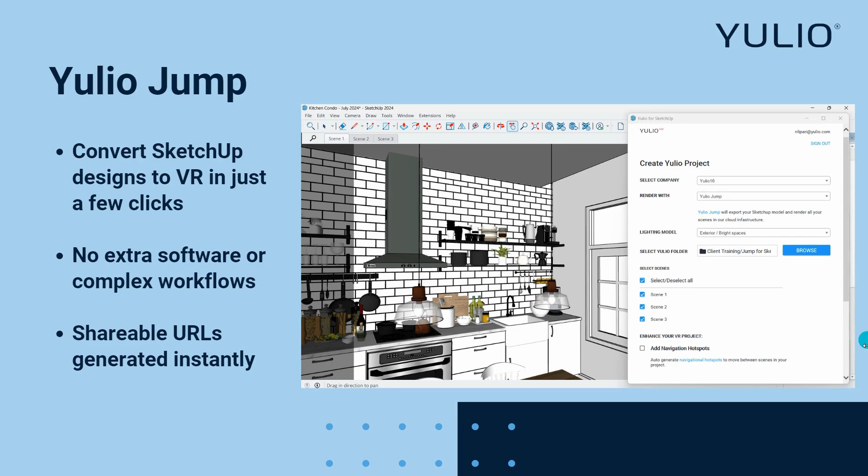To begin rendering with Yulio Jump, you need to start off by installing the Yulio plugin for SketchUp. This can be downloaded directly from the CAD plugins page on our website, which I'll show you now.

So here's this page on our website. You can access it by going to Resources and then CAD Plugins, and you can install that SketchUp plugin right here.

So the Yulio extension is free to download. However, in order to actually use it, you will have to have an active Yulio license.

With the Yulio extension, you can render 360 panoramas, which is the file you need for VR, as well as 2D perspective renders, which you are likely more familiar with. So here's an example: here's a 2D perspective render that you probably have seen before, and here's that 360 panorama, which will be used for your VR experience. Today I'll show you how you can render both of these with Yulio.

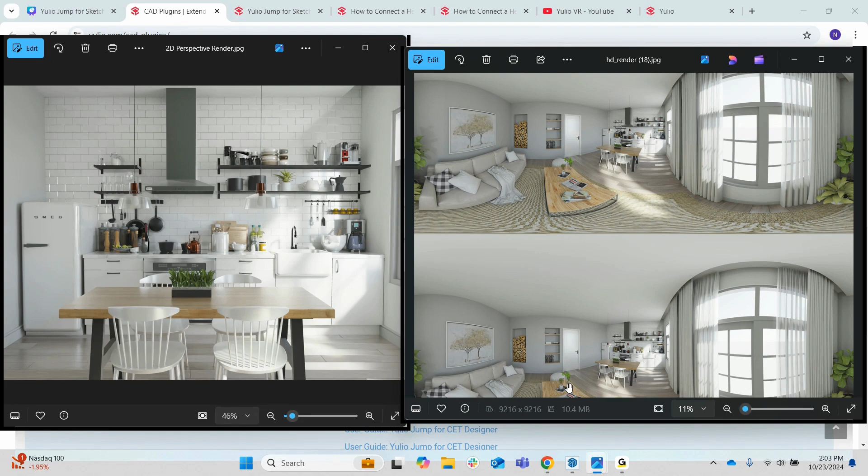All right, let's go ahead and open SketchUp and start preparing our model for rendering. So here's the model I'm working with today. This is just a small condo space. Before you render, you're going to want to think about how you might need to prepare your space.

In most cases, we recommend creating a fully enclosed building shell, so that includes 4 walls, a ceiling, and a floor. This is because when rendering for VR, your clients are not only going to be seeing what's right in front of them.

In VR, your clients will be able to fully explore your space. So if you're showing off an indoor environment, such as a home or an office, having a full building shell will give them a more realistic and immersive experience. And as you'll see later, Yulio's lighting models also work best in this type of enclosed environment, which is another reason why we recommend it.

As you can see, this is my small condo space here, and it does have 4 walls, a ceiling, and a floor.

So on the topic of preparing your model, let's talk a little bit more briefly about lighting. Yulio Jump was designed to simplify the rendering process as much as possible and take all the complexities like lighting off of your hands. This means that when you're building your model to render with Yulio Jump, you don't necessarily have to worry too much about lighting. When you render with Yulio Jump, you'll have 2 lighting models available to light your space.

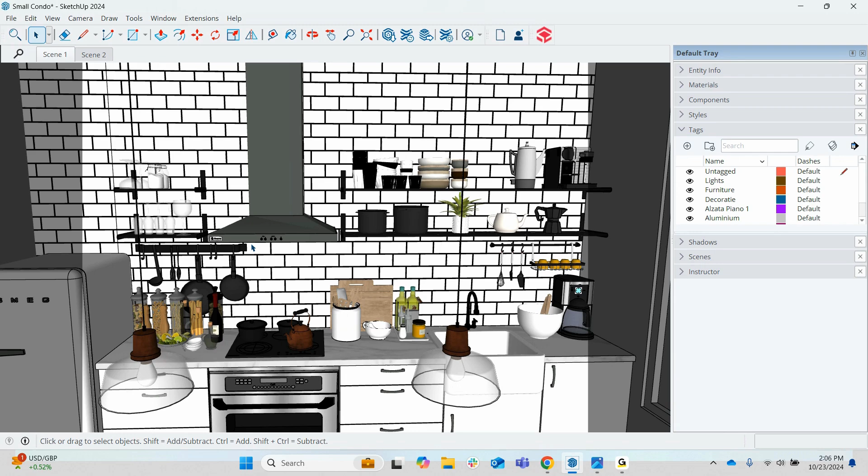Okay, the next thing you're going to want to think about is creating your scenes. So, when creating a project for VR, you can think of your scenes as different camera views that are set up around your space. Adding more than one scene will help your client explore the full scope of your space by letting them move to different areas once that project is turned into a VR experience.

As you can see, I've already set up a couple of scenes here. So I have scene one and scene two. This is a relatively small space, actually really small, so I really only need 2 to 3 scenes. I'll go ahead and add one more and show you how to do that.

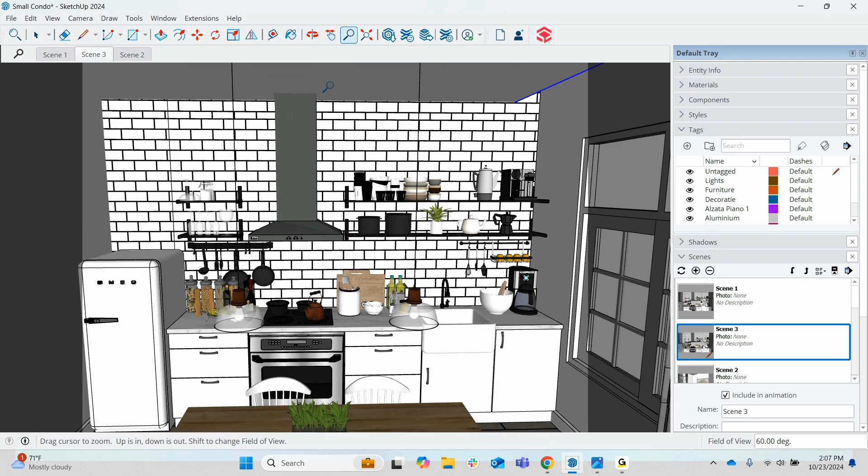I'm just going to click on this, open the scenes menu here, and click on the plus tab. Might make me wait a minute. Okay, there we go. So here's my additional scene it added, and then you can set your scene using the orbit, pan, and zoom tools. So I'm going to do that now. Just going to zoom out a little bit, move down and over, and kind of move into the back corner of the space. This will just take a little bit of fidgeting here.

And that looks about right. So generally, I like to keep my camera level at a standing height, as I'm doing here. This is probably around maybe 5'6". But you can always get creative and experiment with different camera heights.

For instance, if you have a couch or a chair in the space, you can do a seated view, which is something we've seen before. You can also lift your camera up and do more of a bird's eye view. It's really up to you. I generally like to just kind of keep my camera heights at a standing position.

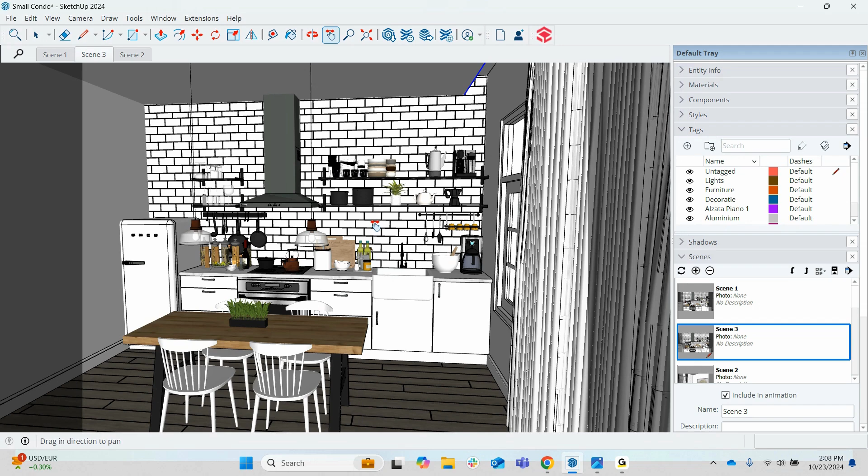All right, so here's where I'm going to place my camera for my third scene. So here's an important tip. When you're placing your camera views for VR, you're going to place your camera where you want it, just like I've done here, and then you're going to move it closer. So you're just going to zoom in a little bit. Let's just zoom into about here.

It might look a little bit funny, especially if you place it maybe like in front of a plant or something. But we recommend you do this because after you render for VR and go to view that scene, it will always appear more zoomed out than you expect. So in order to capture the view you truly want, you're going to want to place your camera in your ideal spot and then just zoom in closer. So that looks about right there.

And these are going to be my 3 scenes. What I'm going to do though is just reorganize my scenes here on the side so that my third scene is moved down. So I'm just going to press this arrow and move that down. And now they're all in order of how I'd like them to be. Again, when creating your scenes, like I said, you really just want to think about the journey or path that you want your viewer to take as they explore your space.

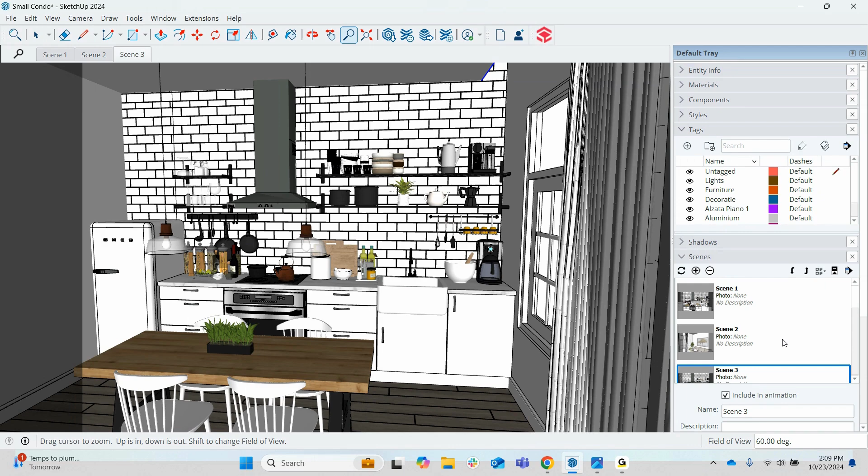All right, now for 2D perspective renders. You can set up your scenes in the same file here if you'd like. When you go to render with the Yulio plugin, you'll be able to select or deselect which scenes you render depending on if you're rendering for VR or 2D. So you don't have to worry about mixing them up.

So you'll set your camera for 2D the same way I just did, except you don't have to zoom in. You'll just place your camera where you want it, and then the view you see will accurately be represented in your final 2D render. By default, when you create new scenes, like you saw, they will be named scene one, scene two, scene three, and so on.

If you would like to customize the name, you can just right click on the scene and then rename it. So say I wanted my third scene here to actually be a 2D render that I want to render later, I can just label it 2D. And then when I go to render with the plugin, I can identify which scenes I want for VR and which scenes maybe I want to render as a 2D.

All right, I am going to be rendering this for VR though, so I'm just going to get rid of that.

Okay, so now that I have my scenes, the next thing I want to show you are some enhancements that we can make to our project before rendering.

So the first is Yulio's enhanced material tags for SketchUp. If you're looking to take the photorealism in your projects to the next level, you can apply material tags to specific objects in your SketchUp project to add a texturized effect to the object, which will be reflected when rendered with Yulio. Enhanced material tags for SketchUp can be used on a list of materials including leather, ceramic, glass, and wood.

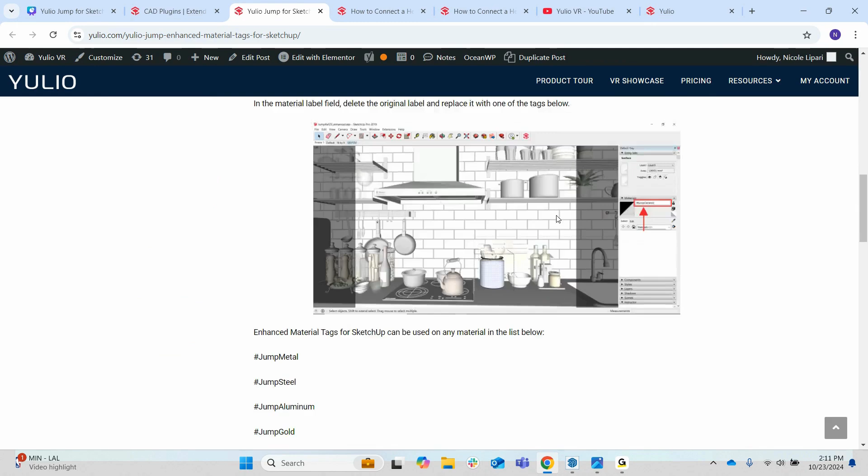If you're interested in learning a little bit more about this later on, we do have a knowledge base article on our website, which I will pull up now. So here's that knowledge base article. You can access our knowledge base by going to the resources tab and then knowledge base. So here's what that looks like. You can view our whole list of enhancement tags here, as well as see some before and after photos to give you an idea of kind of what those enhancement tags can do.

All right, now I'm just going to return to my project and I want to go to scene 1.

Okay, so to add an enhanced material tag, you're just going to click on any material. I'm going to use my hood fan here as an example. So I'm just going to click on this and go to the materials tray. And then I'm just going to click on the paint dropper tool here to identify which material I have on this hood fan right now. So I'm going to select that. Here's the material that I have right now.

And then all I'm going to do is I want to make this a brushed metal, give it a brushed metal effect. So the tag for Yulio's enhancement for this is hashtag jump brushed metal, and I'm just going to add that hashtag in front of the material that I already have here. And that's it. So now when I go to render, this hood fan will have a brushed metal effect on it. You can do this throughout your project on any materials that you want to boost the realism for. And if you decide later that you don't like that material, you can always change it just by updating the hashtag to one of the other hashtags that we have. Or if you just don't want any enhanced material on that item anymore, you can just get rid of it altogether. Okay, gonna add that back.

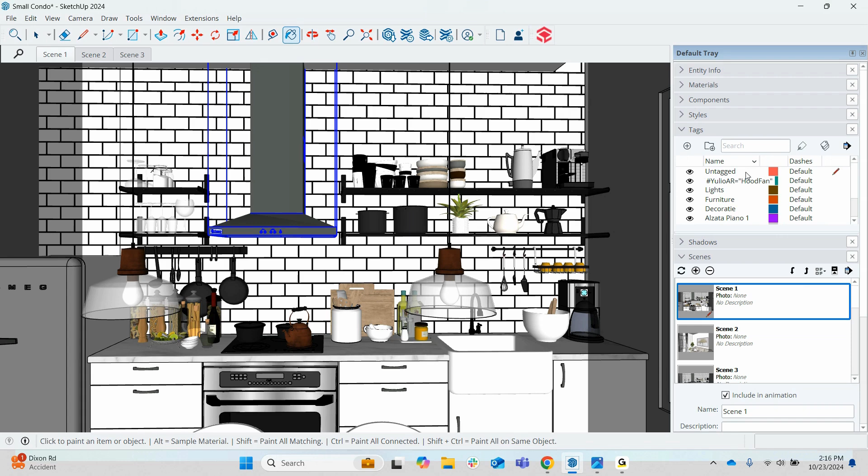So our tagging convention is hashtag Yulio AR =, and then the object name. Your object name can be labeled any way you'd like. We do recommend reflecting the object or objects you plan on including in the tag just to make it easier to identify which is which. So I again am going to use my hood fan as an example. So I will just name this hood fan, and that's it. That will save automatically down here.

Once you've created the tag, you'll need to assign it to an object. Start by selecting the item. I already have this hood fan selected. Then I'll go to entity info and then tag, and select the AR tag I'd like to add the item to. So I'll add this to hood fan, and that's it.

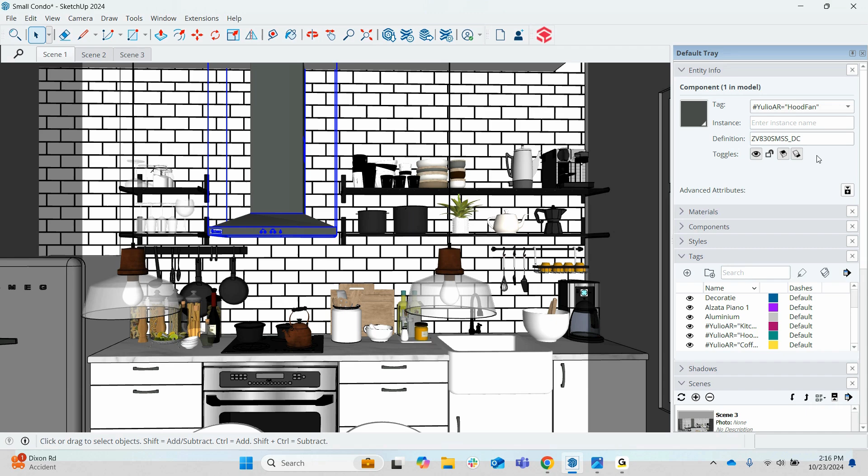For example, later you'll see that we also have an AR object for this kitchen table. The table, as well as all four chairs, were tagged under the same kitchen table tag, so they've grouped together and become one item later on, and I'll show you that.

If you did want to remove the item from the AR tag later, you can just select it again and then select untagged.

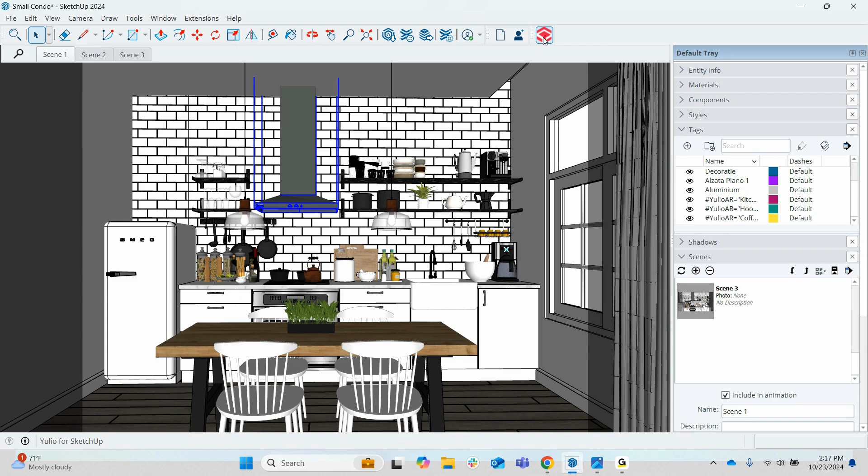All right, now we are ready to render with Yulio. You will begin by clicking on the Yulio extension. It should show up here if you have downloaded it.

Now, the first time you render with Yulio Jump, you'll be prompted to... oops, I don't know what's going on here. Let's close that and try and reopen it.

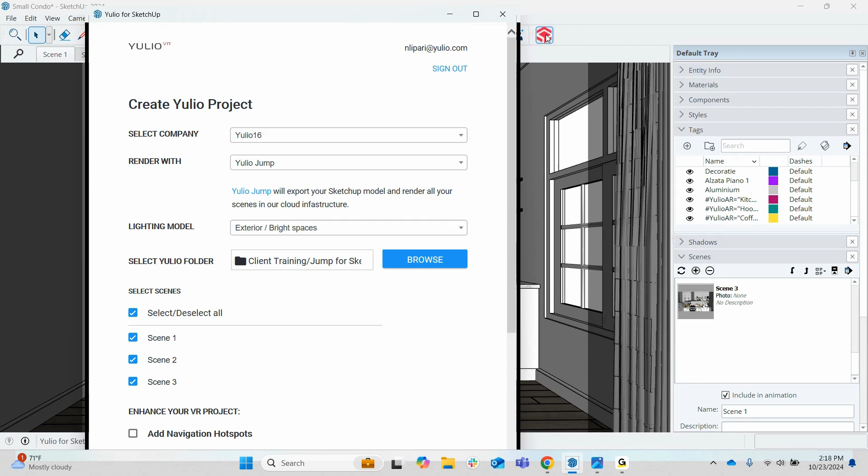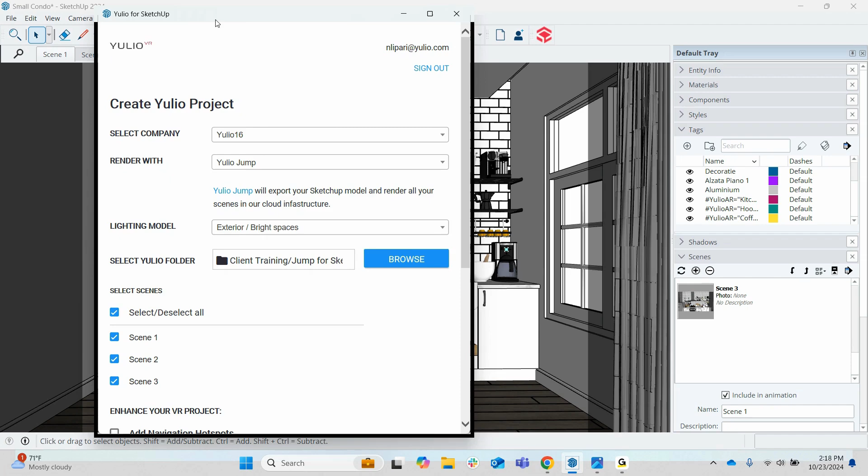The first time you render with Yulio Jump, you'll be prompted to enter the email address associated with your account just to verify your Yulio license. Once you've gone through those steps, you'll go back to the Yulio extension and then proceed with rendering. I'm not sure why it's doing that. There we go.

So here's all the settings that you can edit and apply. First we have our company. Most of the time you will only have access to one company, and it will be listed as the default one. Next you have a few options for rendering.

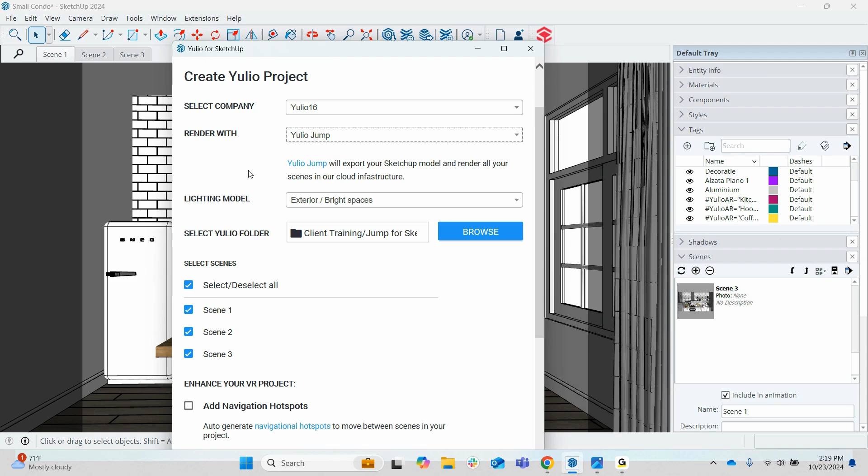You can render with Yulio Jump. Choosing Yulio Jump will allow you to create a VR project that will process and upload directly to your Yulio account. Next, we have Yulio Jump Perspective, which you'll choose when you want to render regular 2D perspective renders.

If you render with Yulio Jump Perspective, it will just be sent right to your email, and you can download the JPEG from there.

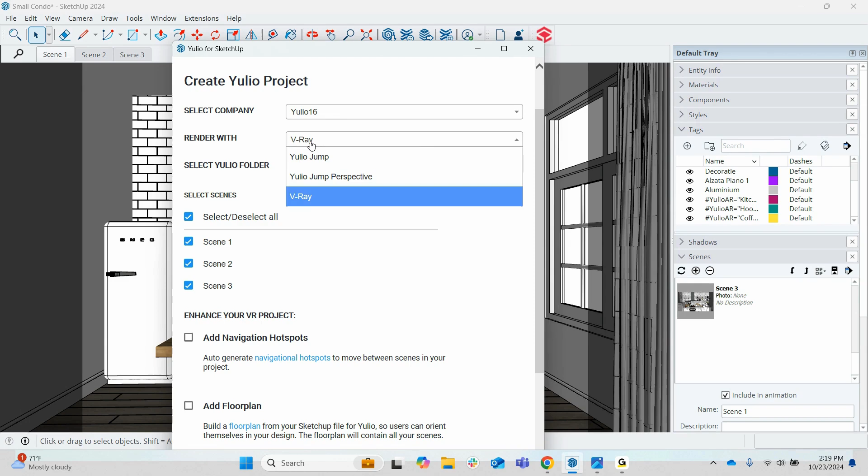Then we have V-Ray. This is a rendering engine that creates lifelike imagery, but it is not a Yulio product. If you render with V-Ray through our extension, your files will just be sent to your Yulio account. We're not going to use that one today; we're just going to use Yulio Jump.

Now here's our lighting models. You can select the lighting model you'd like to render with. I was talking about this earlier—you'll have two different lighting models to render with. The first is exterior/bright spaces.

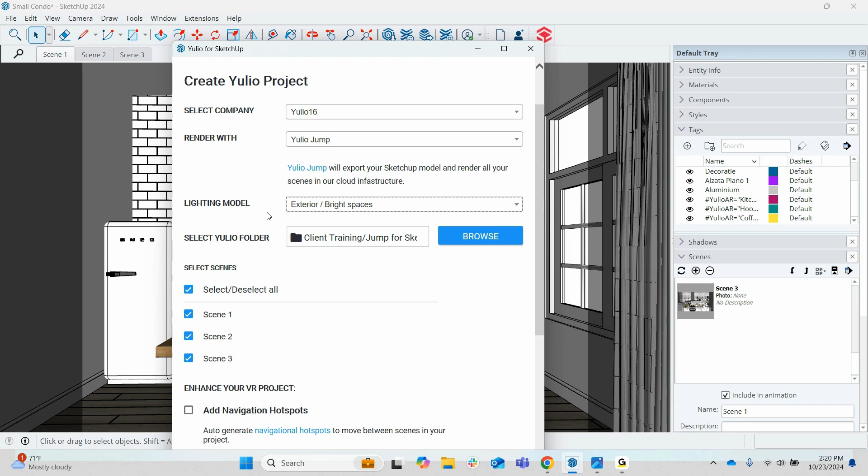This model typically works best in an environment with a lot of windows or even a skylight, because it simulates real world lighting from the sun. That said, today I'll be using this lighting model even though I'm in a space without that many windows. I rendered both lighting models, and with how my model's set up, the exterior lighting model actually looked a little better in my opinion, so I'm going to render with exterior today.

We also have interior, though. This lighting model typically works better in spaces with few to no windows, since it combines sunlight with artificial ambient light to evenly light your space. I'm just going to go back to exterior here.

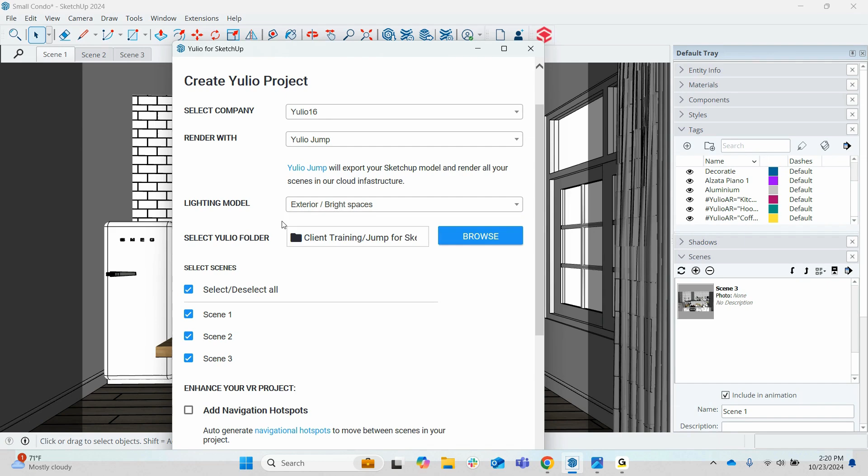Perfect. Okay, next we have the Yulio folder that you want to choose from. This essentially allows you to select which folder in your Yulio account you'd like the VR project to be uploaded to.

And then here we have our scenes, where you can select the scenes you'd like to render. If you remember, I said that if you set up your scenes for both VR and 2D perspective, you can select or deselect those here depending on if you're rendering for VR or just want to download the 2D perspective renders. All of these are my VR scenes, so I'm just going to keep all of those.

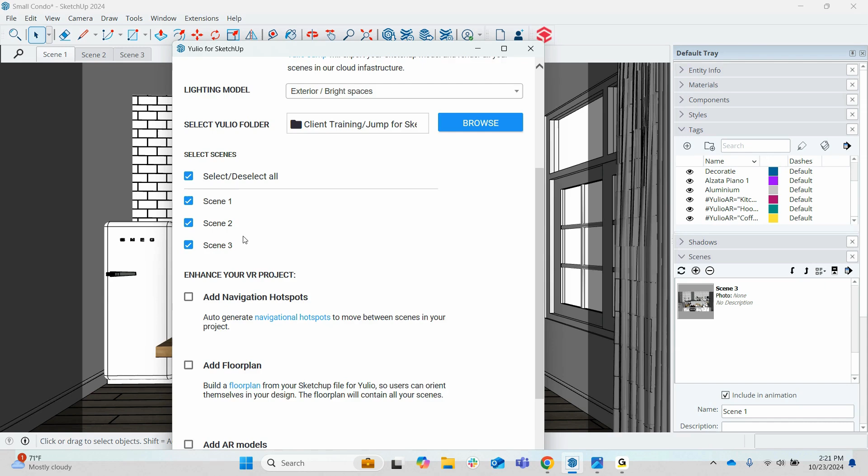Now we have our project enhancement. Here we have navigation hotspots. By selecting navigation hotspots, Yulio will auto-generate navigational hotspots for your project so you can move scene to scene when viewing in Yulio. If you'd prefer to do it manually, you can always add these navigation hotspots later.

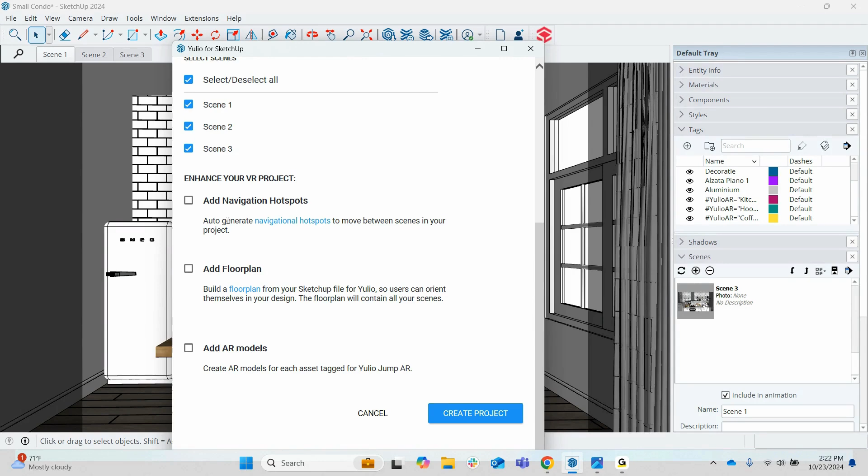I'm going to add them. Okay, next we have floor plan. By selecting add floor plan, Yulio will automatically build a floor plan from your model.

And then lastly, we have add AR models. You'll select this if there are any items in your design that you have tagged as AR. When you select this, any AR object you've tagged will be created and inserted into your VR project as an interactive AR hotspot. We added AR models, so we're going to select that as well. Once you've selected all your preferences, you'll just click on Create Project.

The time to process and render will depend on the size and complexity of your project. To give you an idea, a smaller project like this one should only take about 5 to 10 minutes. Regardless, when your VR project is ready in Yulio, you'll receive an email notification to let you know. I'm not going to render this today to save us time, I've already pre-rendered it. If you render with Yulio Jump Perspective, your 2D renders will be emailed to you.

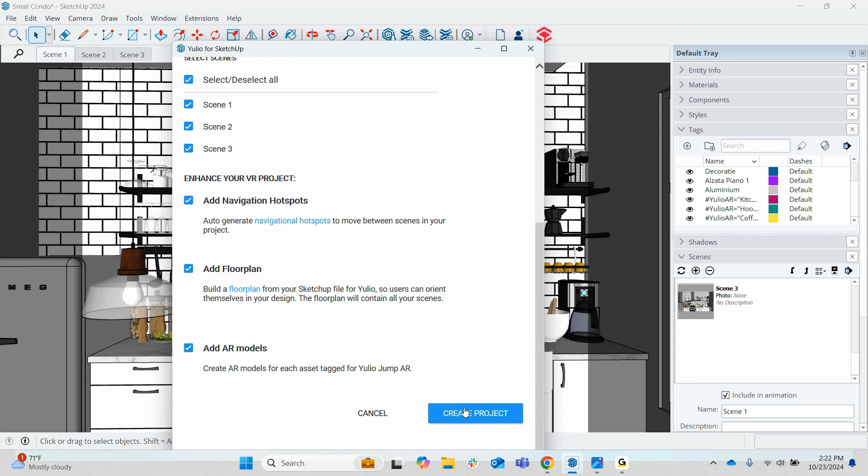So like I said, I've pre-rendered this project, so I'm going to open that up now. Here's my rendered project. Once it's done, it will show up in your account or in your folder in your account, and it'll look something like this. So I'm going to open that up.

We're going to start off just by viewing our project in browser mode. Browser mode just means that you're viewing the project from an internet browser on your computer, phone, or tablet. There are a couple different ways you can open your project to view it in browser mode, but from this page I'm just going to select the View in 360 icon, and this will open it in a new tab.

While viewing in browser mode on a computer, you can click and drag your mouse to look around the scene. If you're using a touch screen device, you can just use your finger to hold and drag along the screen to view the project.

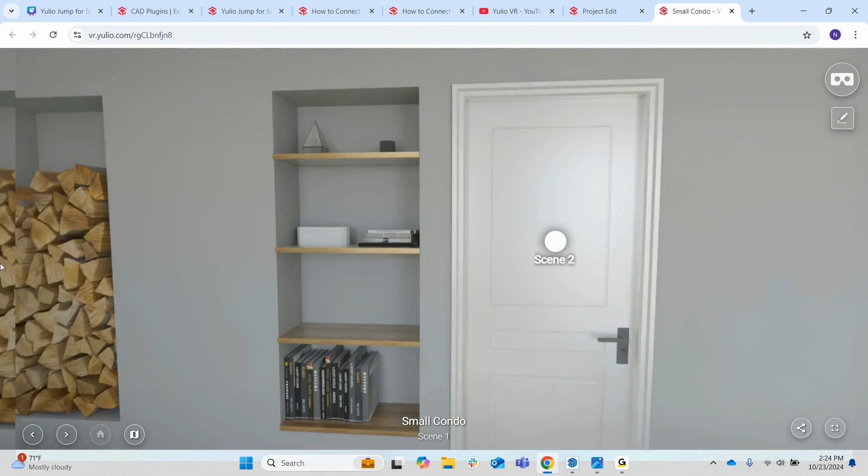The first thing I want to note is the lighting. As you can see, the exterior lighting model lit up the space really nicely. You can even see the shadows that it creates to really give it a realistic look.

As we look around, you'll notice our navigation hotspots and AR models in the scene. These are the hotspots that we generated with Jump. Here's the hood fan AR model that I tagged, and here is my different scenes. The scene that I added is actually over here, and I can click on that now and show you. That's what that looks like.

Sometimes when you render your navigation and AR hotspots with Yulio Jump, their location or size can be slightly off. If you ever notice this, you can always go to your hotspot editor and adjust those hotspots later. You would just go to your hotspot editor by selecting this button here.

Actually, I'm going to go in and show you this. Let's open the hotspot editor. So in this editor is where I can edit my hotspots. If I added any other enhancements, like audio, images, and video, they would all be included here, and I would be able to drag and drop them into my scenes. And then, if you ever wanted to change the size of your hotspots, you can click on them and adjust the size here.

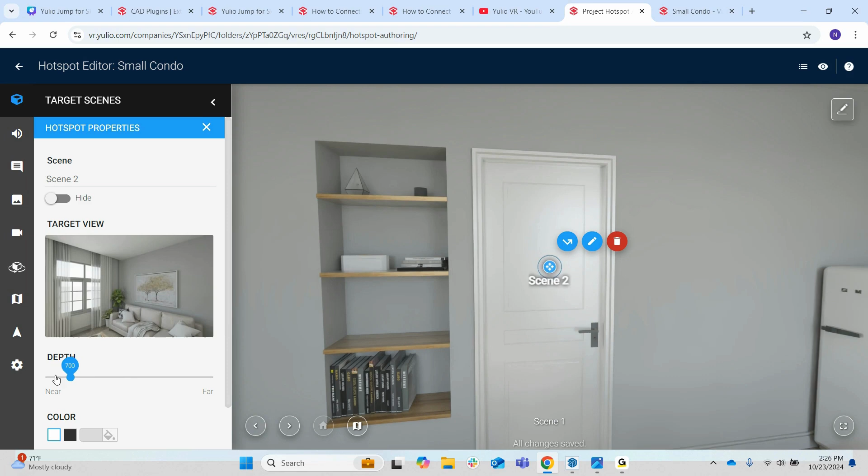If you wanted to add audio, images, and video, you would do that within this project edit page here. Let's go back to our project. Like I said, if your project has navigation hotspots, you can click on them to navigate to a new scene and then move throughout the space.

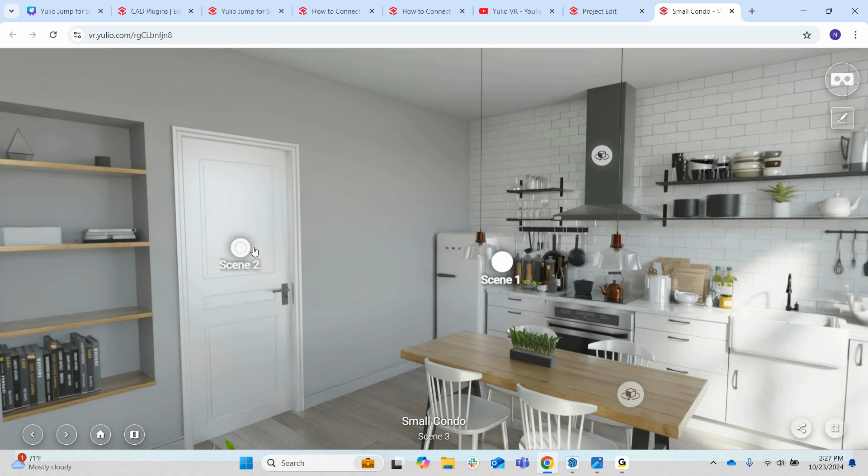Let's go to scene 2. As you can see, I'm just in a new scene and it gives me a different perspective of the space, and maybe I can see different things more clearly from this angle than I would on the other side of the space, which is great.

If you also had Yulio Jump create a floor plan like we did, you can activate that by clicking on this floor plan button on the bottom left side of your screen, and it will open up like this.

All right, so that's the browser experience. Viewing in a VR headset is similar in that it's super simple to navigate the experience. It does, however, provide a much more immersive viewing experience. If you're interested in viewing in VR, we recommend a Meta Quest headset because it offers the best viewing experience at a pretty affordable cost.

Viewing in VR does require some initial setup, which due to time today I'm not going to get into. If you're interested in learning how to connect a VR headset to your account, we have a lot of resources you can check out. We have a knowledge base article that goes over connecting a headset to your account, and we also have a YouTube channel with plenty of video tutorials, as well as a VR headset webinar.

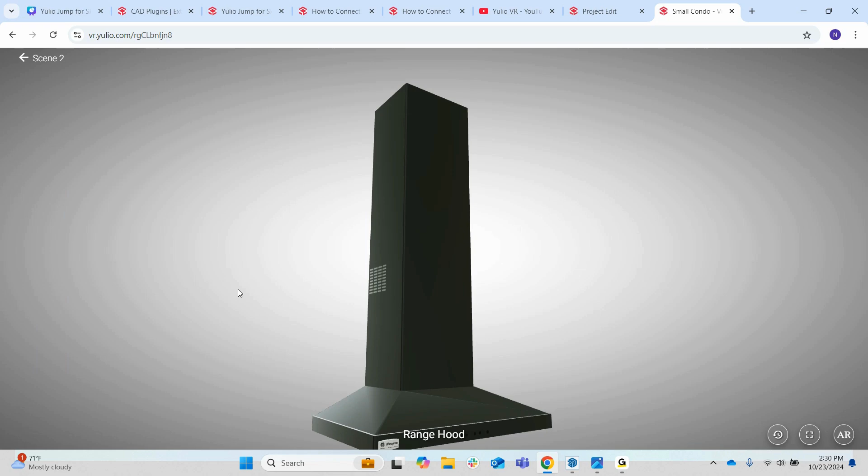So this is the browser mode experience for AR, and it's pretty much restricted to this view where you can see it in full 360, which is cool. But to get a more interactive experience and see the model in your physical space, you can select this AR button and scan this QR code with a smartphone or tablet.

On most smartphones or tablets, you can simply open up the camera app and point it at the QR code to scan. A link should appear, and you'll click on that to open the model in Yulio. I'm going to actually show you what this will look like.

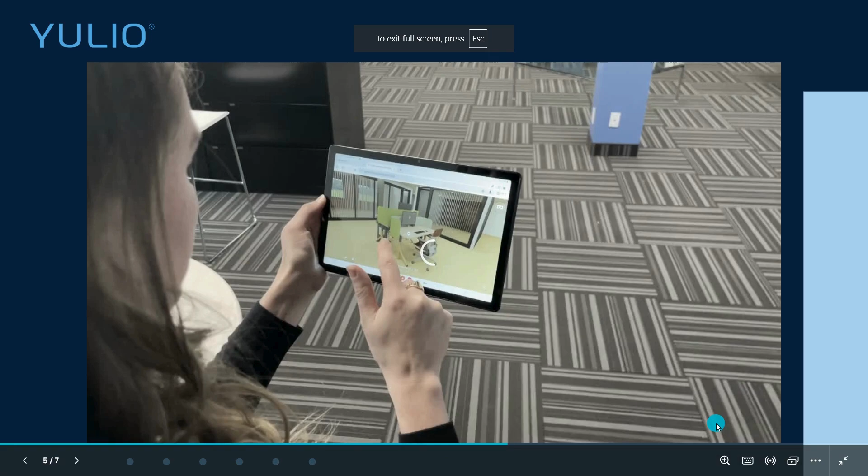Here's one of my colleagues, Dana, viewing an AR model on her tablet. She's just scanning the space, and then the AR model will pop up and she can position it, lift it, tilt it, and place it exactly where she wants in her own physical surroundings.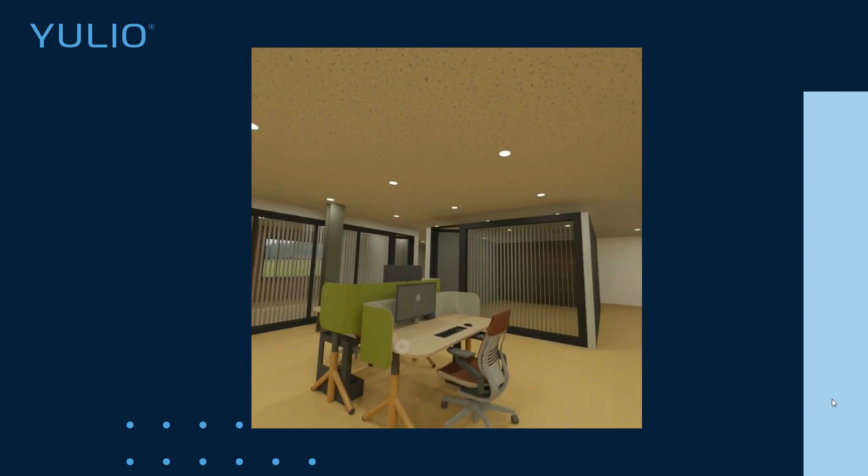Now, if you're in a VR headset, here's what that will look like. When you open the AR model from your headset, it will be similar to the phone or tablet experience in that you can view the object in your own physical space. It's just elevated even more because it's more immersive from directly within that headset. It's a really cool experience.